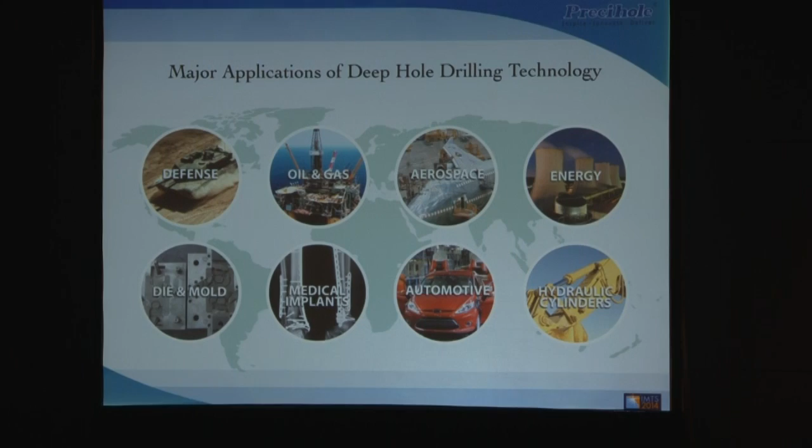So, deep hole drilling technology, although it finds applications in many industries, the major applications really are defense, firearms, oil and gas, aerospace, energy, nuclear, solar, wind, die and mold, medical implants - all your bone screws and cannulated nails and drills - automotive, and there are probably hundreds of applications within automotive itself. And then hydraulic cylinders - you have skiving and roller burnishing machines that do hydraulic cylinders. So this is essentially the gamut of where most applications are found for deep hole drilling technology.

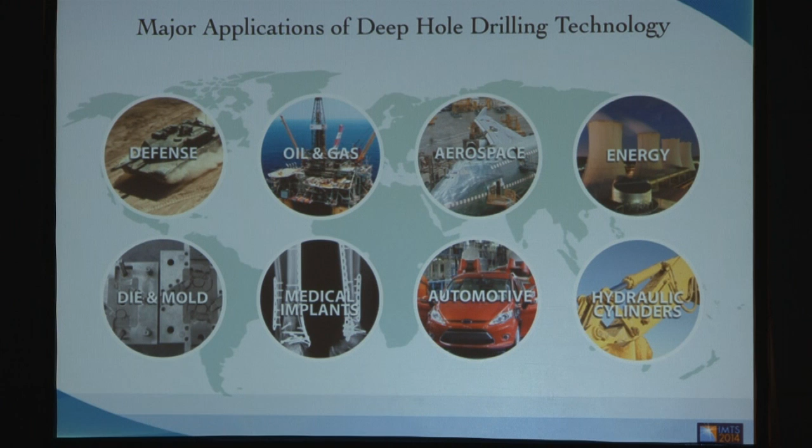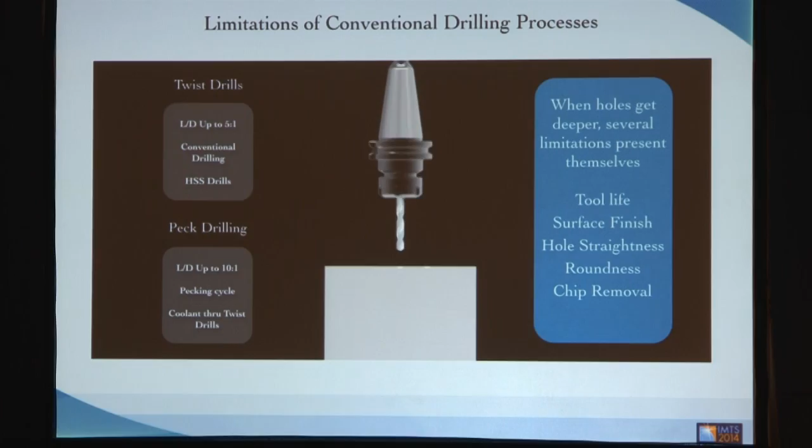Let's take a look at deep hole drilling fundamentals. Essentially, with conventional drilling using normal HSS twist drills, the length to diameter ratios you can achieve aren't much - 5:1, 7:1, etc. You can get slightly more by using peck drilling to get your chips out, maybe 10:1 or slightly more. Coolant-through twist drills can also help with this. But really, when your holes get deeper, issues like tool life, surface finish, roundness, hole straightness, and chip removal become a problem. And that's exactly where deep hole drilling technology comes in.

So what is a deep hole? How do you define a deep hole? By definition, wherever the length to diameter ratio is more than 10, that hole is defined as a deep hole.

The different configurations for deep hole drilling are: first, where the tool is rotating and the component is stationary - used for asymmetric parts with off-center holes. Second, where the part is rotating and the tool is stationary and feeding - used for round parts with central holes. And third, where the tool is rotating and the part is counter-rotating, which gives a very straight, precise hole, more accurate than the previous configurations. This is obviously more expensive because counter-rotating the part means the setup, steadies, etc., grow, so the machines are more expensive, but it's still a better technology to use if you can.

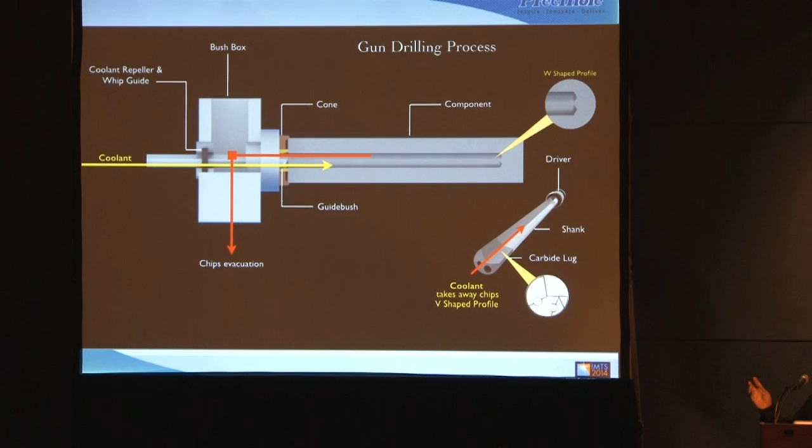The design of the gun drill, as you can see on the side, consists of three parts. The outer part is the carbide lug, which is brazed onto a long tube, and then there is a driver that gets inserted into the spindle. So this is the design of the gun drill. The coolant comes from within, and the chips and swarf come from outside this kidney-shaped cavity.

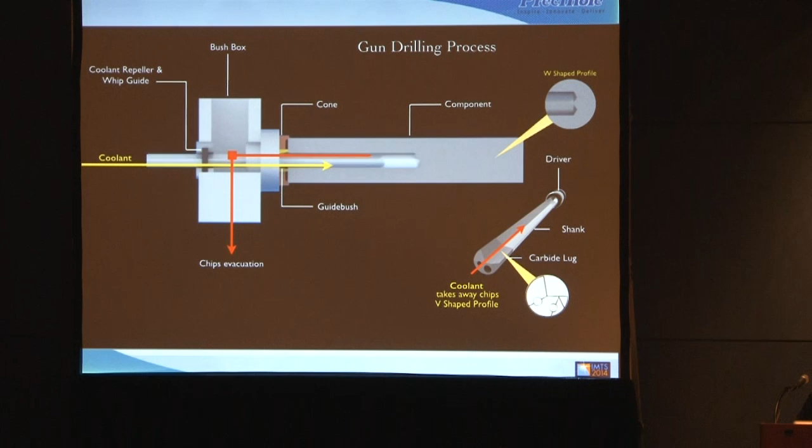Let's take a look at it one more time. Let's take a look at the BTA drilling.

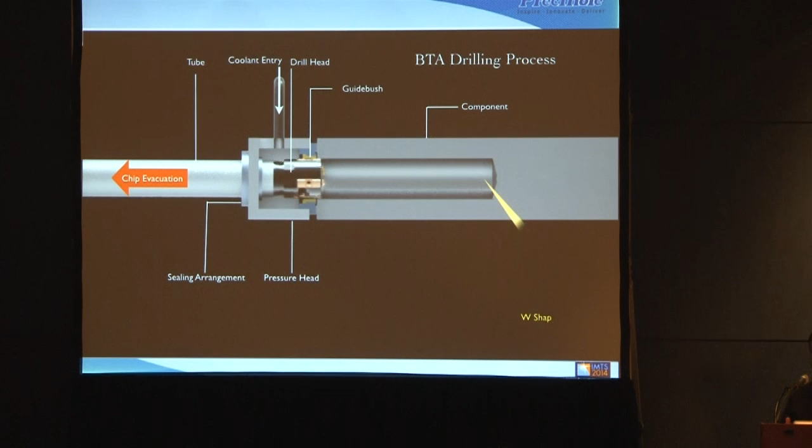For larger diameters, you have the BTA process where the component is held in a cone or chuck, and you have a pressure head from which high pressure oil is put into the system. The drilling action takes place, and the chips and coolant are fed from behind, going back through the tube and evacuated. This is the arrangement for the BTA drilling process.

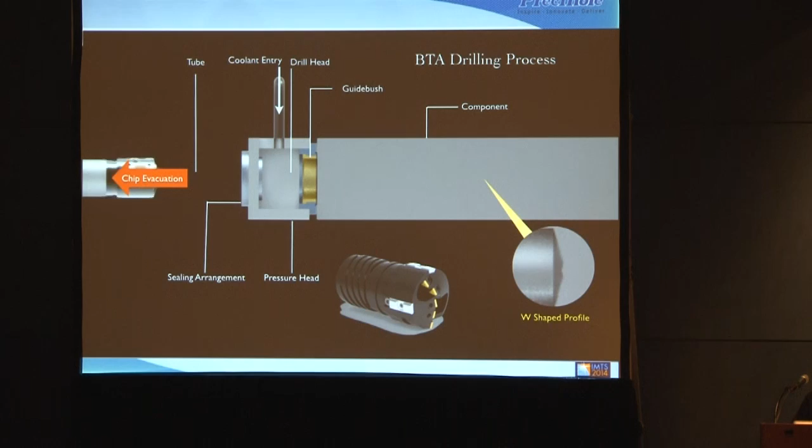Now let's take a quick look at some of the output measures in deep hole drilling. Really, this is what defines success. How do you measure deep hole drilling? There are three critical parameters, and we'll focus the rest of the presentation on ensuring how to get the best output for these parameters. The first one is hole straightness, the second is hole tolerance, and the third is hole surface finish. If you can control these three parameters, you have success in your deep hole drilling application.

How do you define hole straightness? Hole straightness is defined as the maximum deviation for the hole compared to the center line. There are a lot of factors that affect your hole straightness, including the configuration of the gun drilling setup. As we said, there are three setups, and the counter-rotating setup gives you the best results.

Guide bush design and accuracy - we're going to talk a lot about guide bush for the process in the coming slides. The tool and insert condition, the tool geometry, the angles and tapers that you have, the input condition of the component itself - how well is it faced, how well is it chamfered, and the material itself.

The material in deep hole drilling is very, very important. If you have good quality material that is homogeneous - meaning the hardness of the material is even throughout - you get very good results.

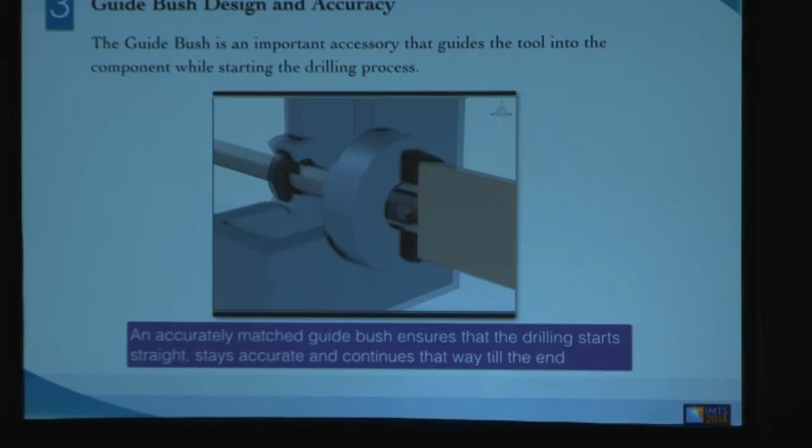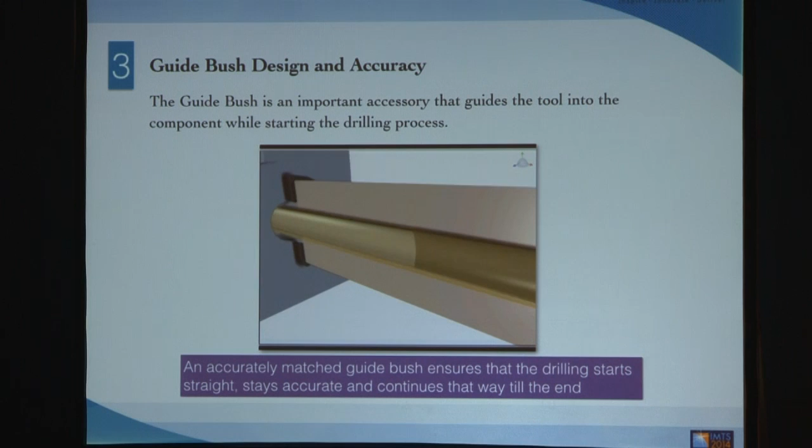The next very important factor is the guide bush. The guide bush is an accessory that guides the drill into the part when the drilling process starts. This particular guide bush is a very critical factor, because if you don't have good matching, then the drilling starts bad, and what starts bad really cannot end good. Essentially, a guide bush is a very important accessory to have in deep hole drilling.

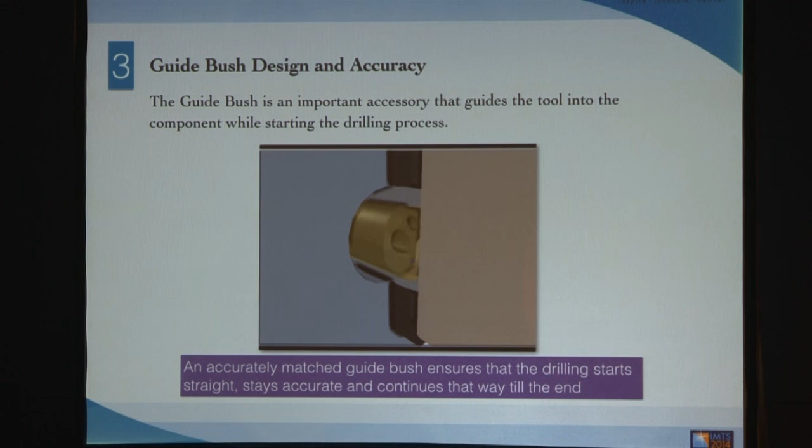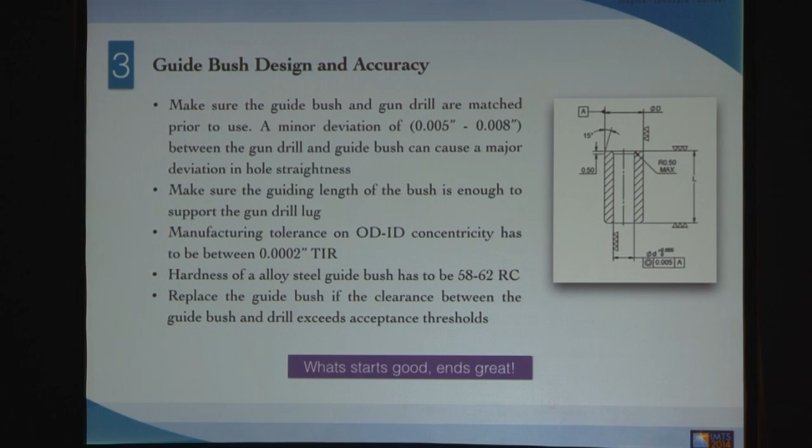Some additional notes on the guide bush, since it's that important. Really make sure that the guide bush and the gun drill are matched prior to use—that's one of the best practices. You cannot have any play between the guide bush and the gun drill; it needs to be manually matched for best results. Any play results in bell mouthing at the start of the hole, and once that gets bad, it's very difficult to correct later. The guiding length of the guide bush is also very important—it needs to make sure the gun drill has enough support when it enters the component at the start of drilling.

The manufacturing tolerances matter too. We manufacture guide bushes, but we spend the most amount of time manufacturing the guide bush rather than any other part of the machine, because it's so important. The manufacturing tolerances on these guide bushes, whether for gun drilling or BTA, is very important. Hardness of the guide bush is also critical, because if you don't have enough hardness, it's going to wear out very soon and you'll have to replace it. So what starts good ends great—that's the general rule for guide bushes. It's a very important factor in deep hole drilling.

The next factor is obviously the tool or insert selection for your deep hole drilling. Many tool manufacturers give a wide range of speeds, feeds, and coolant pressures as recommendations for your application, but those recommendations really need to be fine-tuned. Selection of the right tool is key—if you have harder materials, you need a coating on your tool to successfully drill them. The grade of carbide used in drilling is very important, as is the configuration of the support pads for gun drills or BTA cutters. There's a lot of choice that tool manufacturers offer, but selecting the right one makes a big difference in your output results.

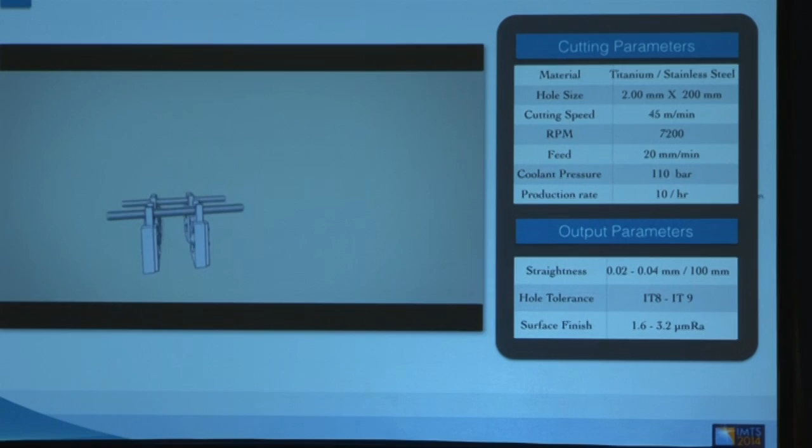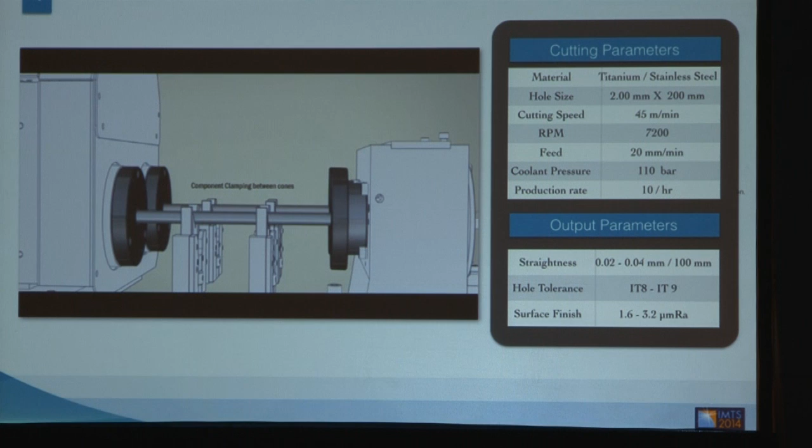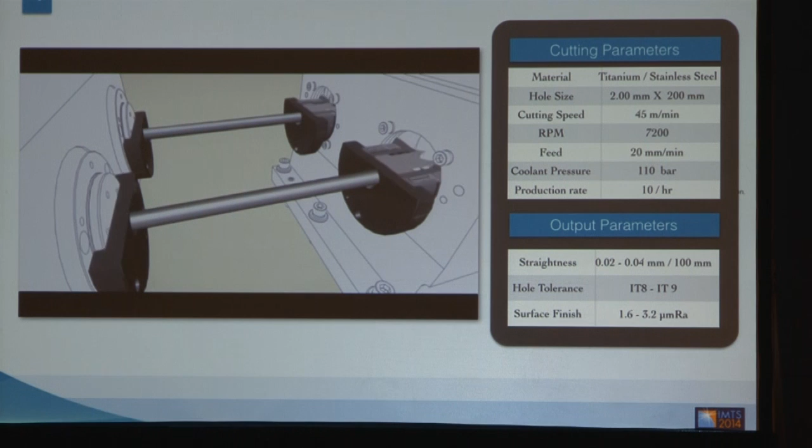So this is in the medical implant industry, these are bone screws being drilled. The material is titanium or stainless steel, which are the toughest materials to drill.

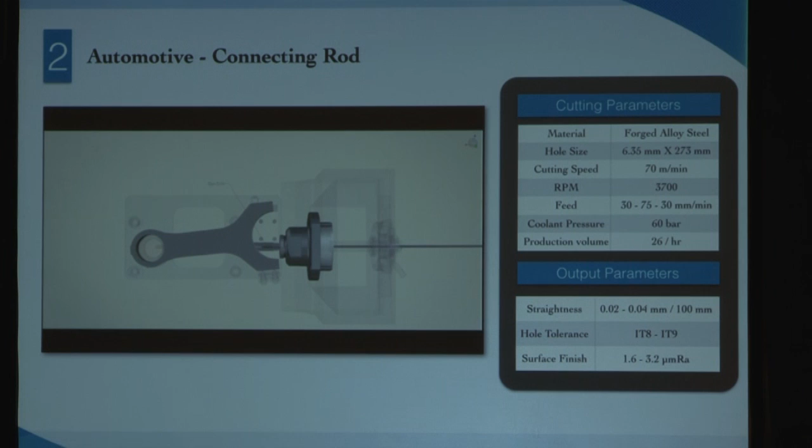The next one is in the automotive sector—connecting rods that need to get drilled. This is actually an angular application, so the design of the guide bush and the butting of the guide bush to the component are really critical. You'll see how the drilling takes place: the angular guide bush butts against the component, and then the drilling starts. This is essentially angular drilling, using a fixture on the table.

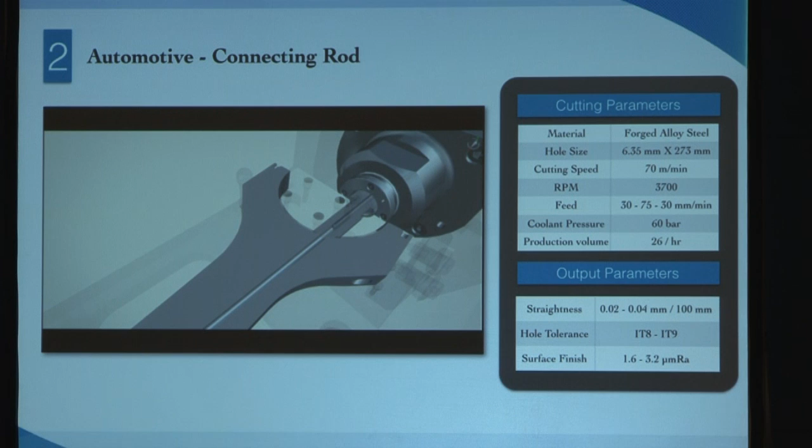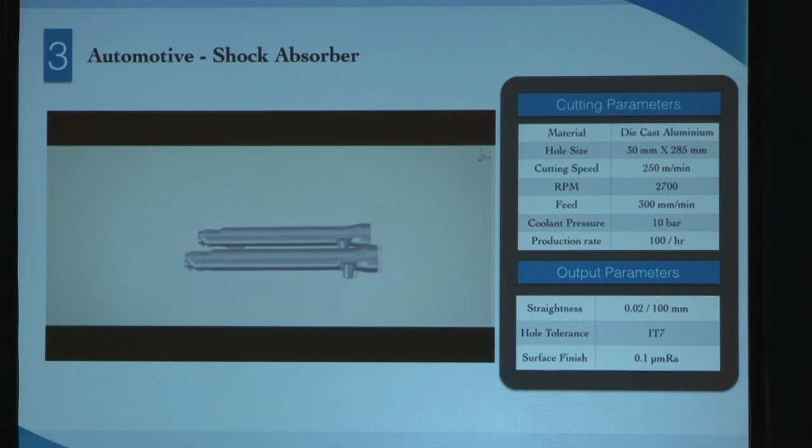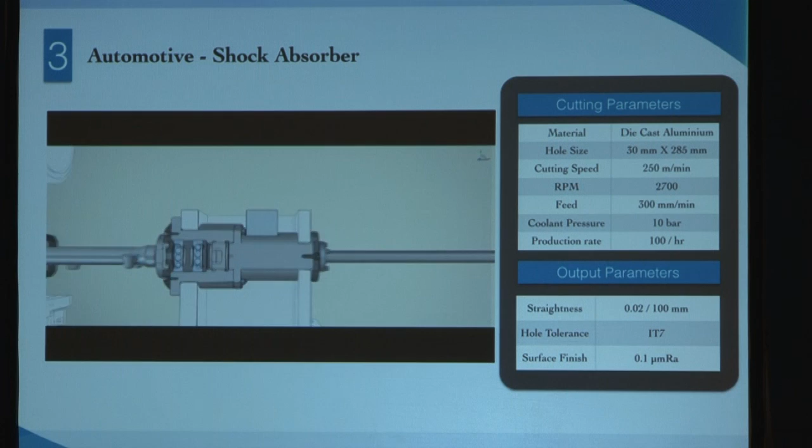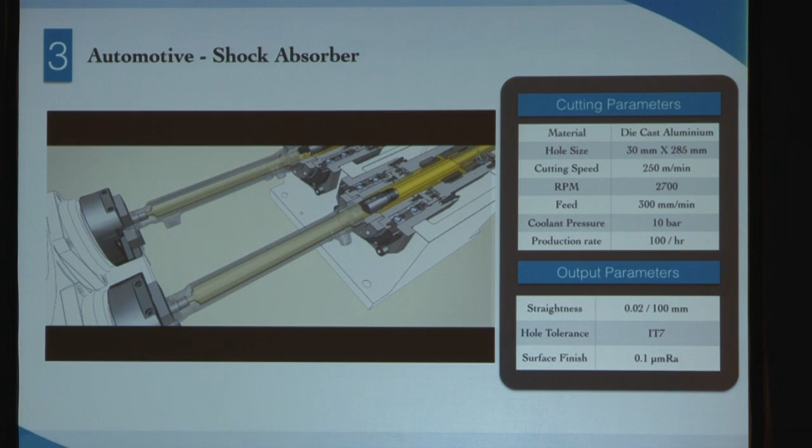The next application is a shock absorber, where you are counter boring and finishing, not just gun drilling—the hole already exists and you're trying to enlarge and finish it. This is also an automotive application. You'll see the setup: the inside of the pressure head and guide bush, with the drilling tool coming in to enlarge and finish the hole. The components are rotated, the cutting tool comes in and bores the component, and the production rate is about 100 an hour for these components.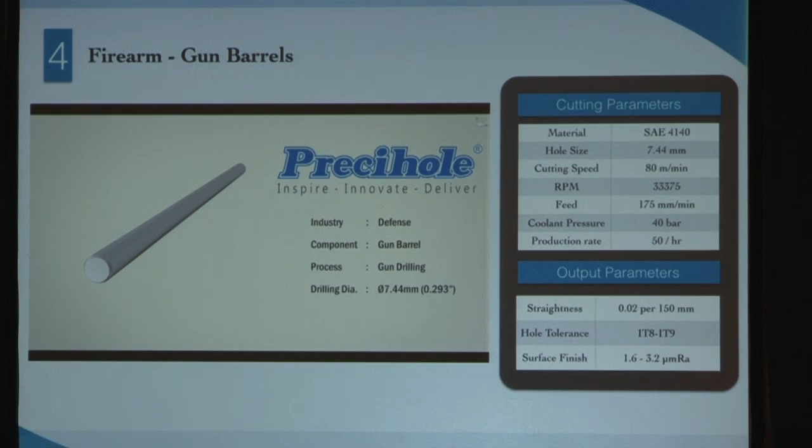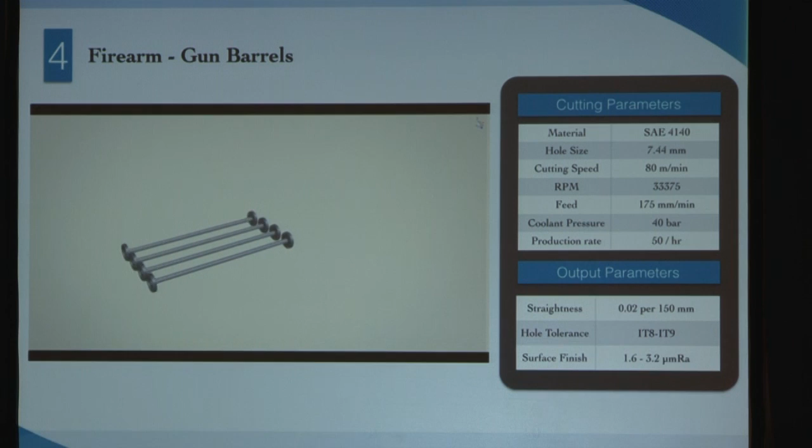The next one is a favorite in the gun drilling industry—gun barrels, a very common application. These are AR-15 barrels, essentially. The material can be 4140, 4150, or SS416R. We have a 4-spindle machine for drilling these for high volumes of gun barrels, with feed rates of about 7 or 8 inches per minute. This produces about 50 barrels an hour with very good straightness, surface finish, and hole tolerance.

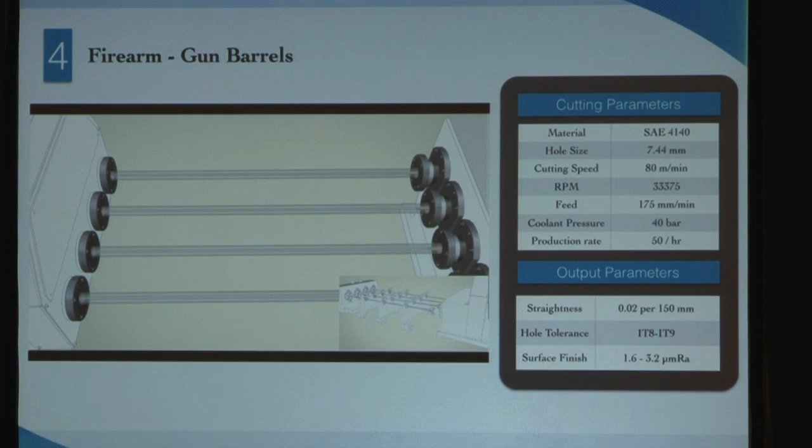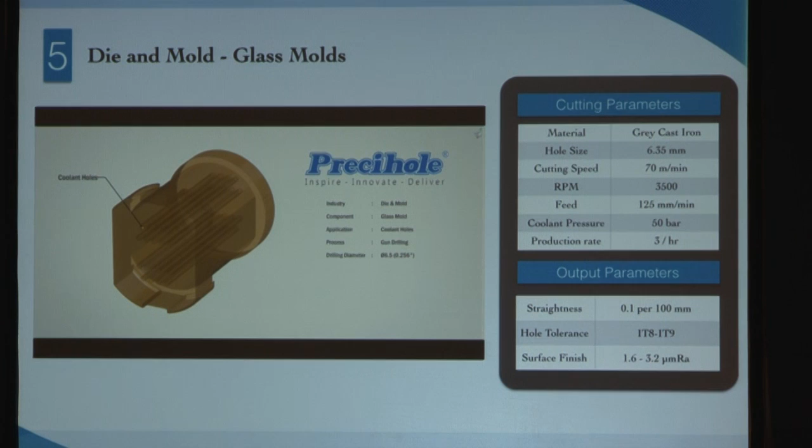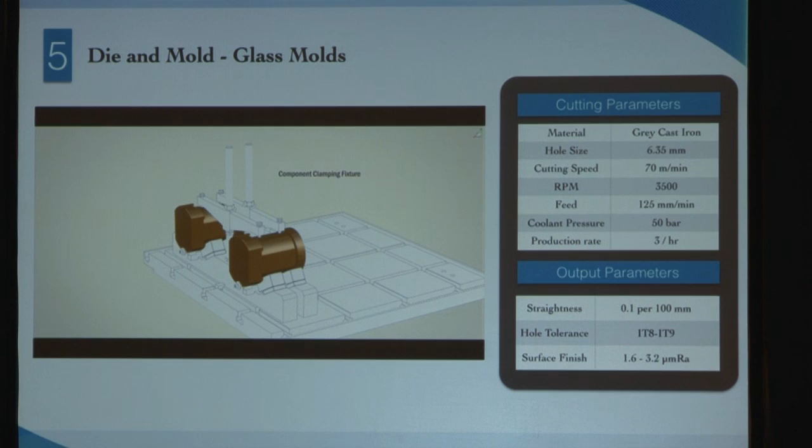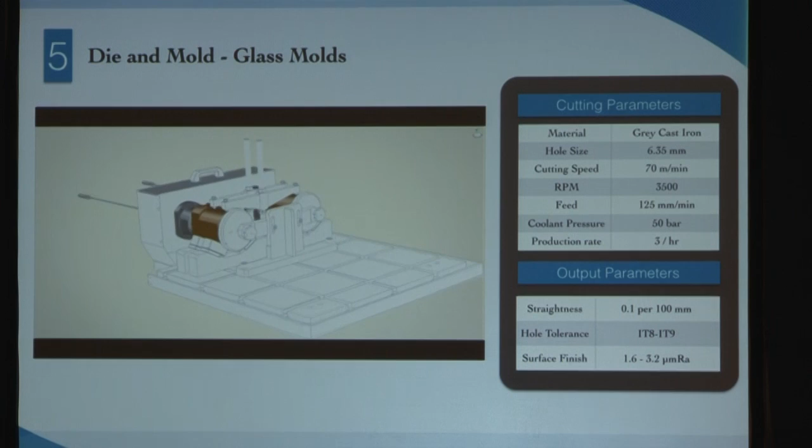The next one is an XY type of application, where multiple holes need to get drilled in one setup. The best example is glass molds, which have about 90 to 100 holes that get drilled. The production or volume requirement of this industry requires a multi-spindle machine—1, 2, or 4 spindles for drilling these holes. Multiple holes get drilled in just one setup, very accurate, very fine holes in cast iron or brass.

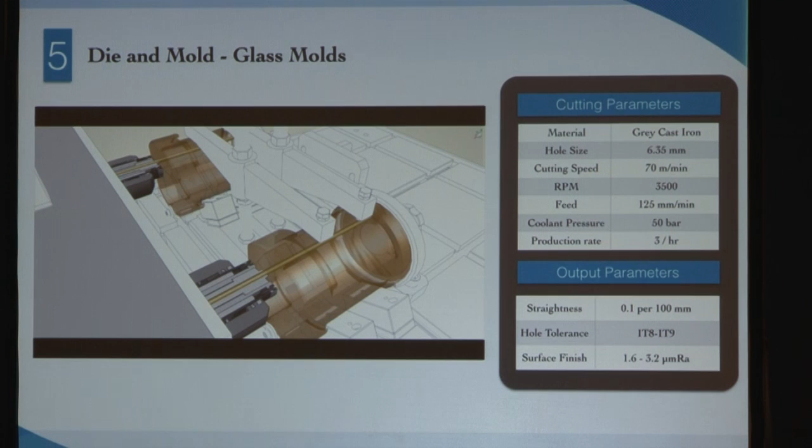You can see the gun drill comes and drills the first hole, then the table indexes by itself, locating the next hole, and then drills the next hole. So using this type of setup, you can drill hundreds of holes in one part in just one setup.

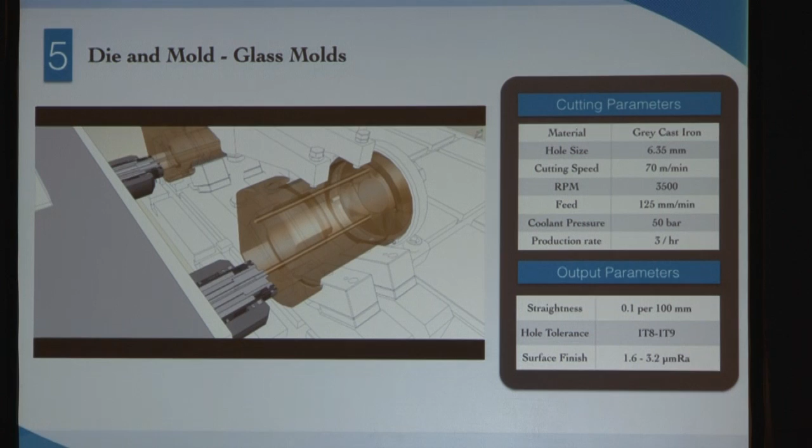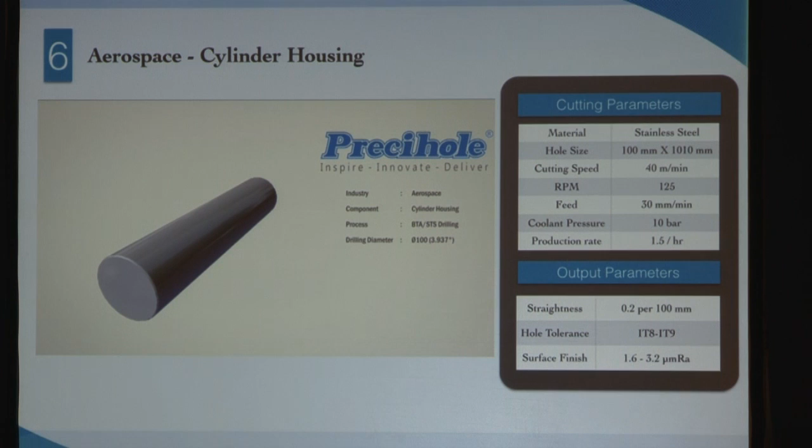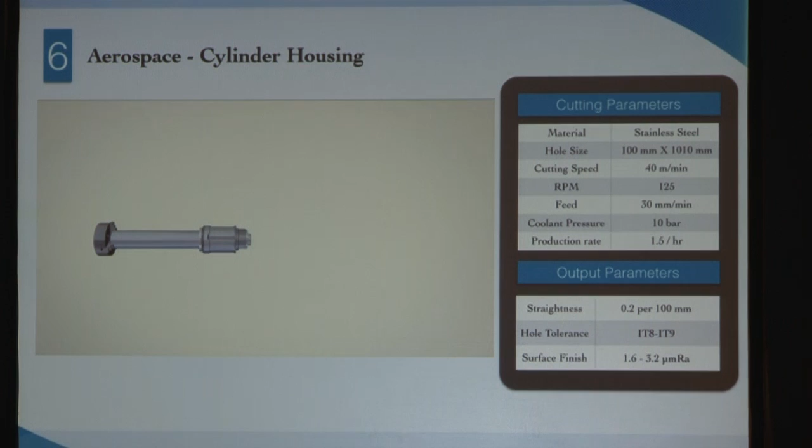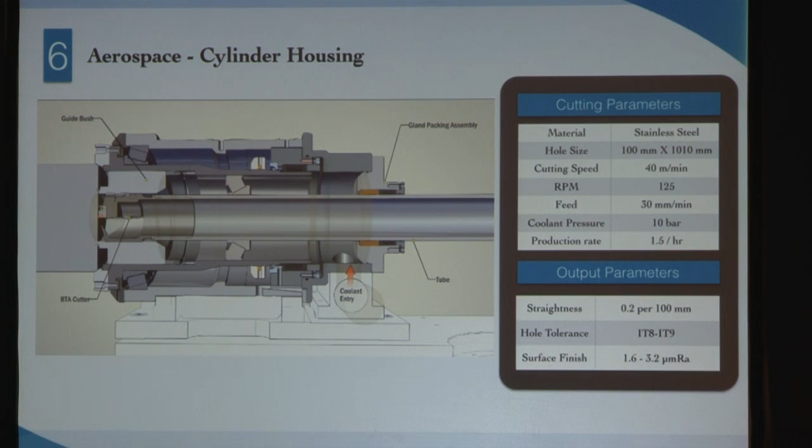The last one is a cylinder housing, in which I'm going to show you BTA drilling. We covered a lot of gun drilling applications, but for BTA drilling, this is about a 4-inch hole. The component is located back in the chuck, with a steady vibrational damp. This is the inside of the pressure head and guide bush.

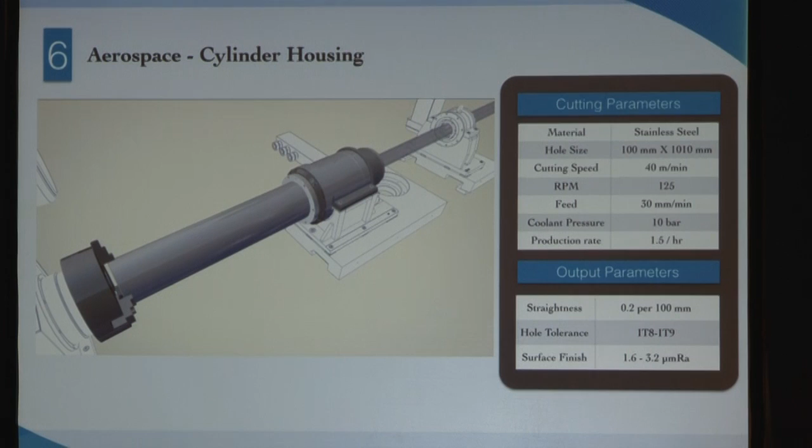So these were some real-world examples of how the drilling takes place, what are the cutting parameters, and what are the output parameters that you can get.

Now let's take a quick look at machine tool solutions that Precihole offers. Predominantly, the machine tools we offer are divided into 3 parts. The deep hole drilling machines.

You have single-axis gun drilling machines, multi-axis deep hole drilling machines, BTA drilling machines, multi-axis BTA drilling machines, ejector drilling machines. Then you have hole finishing machines, which are skiving and roller burnishing machines, honing machines, pull reaming machines, and lapping machines. And then we have custom designed special purpose machines that suit your applications.

Really highly customized deep hole drilling machines that are designed and suited for your applications. Facing and chamfering machines, broaching and rifling machines, for all small as well as large bore calibers. And then you have boring machines.

Our gun drilling machines — this is the world premiere that we have at IMTS for the micro gun drilling machine. It's really suited for the medical industry, but in fact, any small hole from 1 millimeter to 6 millimeters, up to a foot long, up to 12 inches, can be done on this machine.

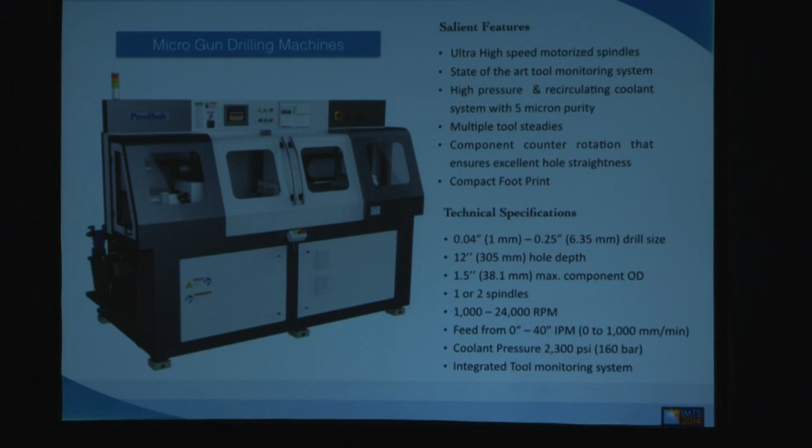We are providing 2 spindle configurations — it comes in 1 or 2 spindles. It has ultra high speed motorized spindles, coolant pressures up to 2300 psi, 1 or 2 spindles, as I said, 24,000 RPM on the spindles. Tool monitoring system already built into the system, and a very, very compact footprint — more like a tabletop design.

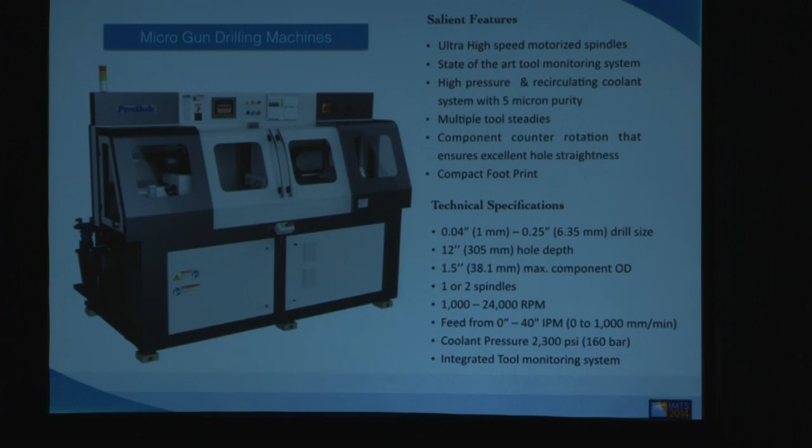And these are just some pictures of our micro drilling. We are in S8536 in the South Hall — you can come and visit us. But this is the machine that we are really premiering at the show. This is the world premiere — the first time we are introducing this machine. It's already proven, and we are introducing it here at the show.

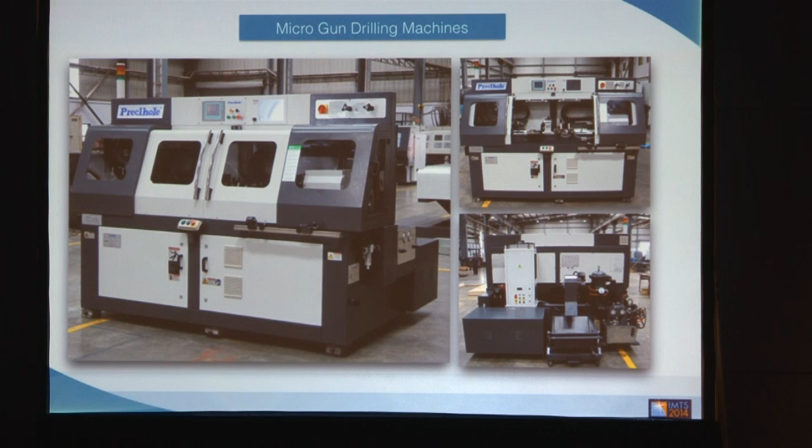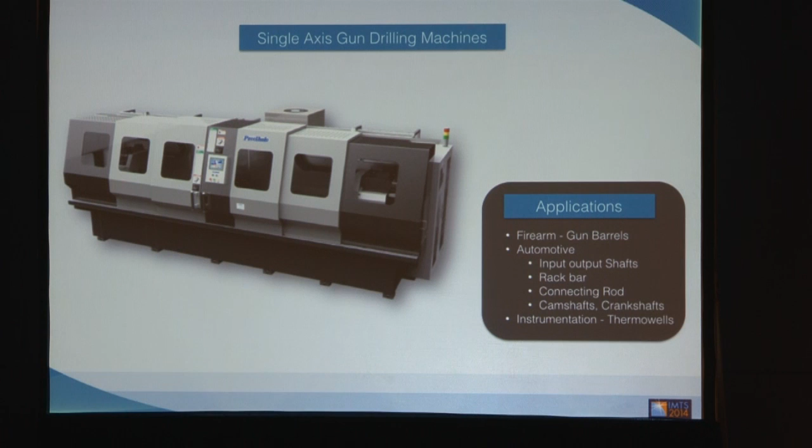Our workhorse is really the single-axis gun drilling machines — we make most of them in a year. Applications are in firearms, gun barrels, automotive, and a lot of applications in automotive instrumentation as well. These come in 1, 2, or 4 spindles, and in 24 inches, 30 inches, 40 inches, 60 inches length. So these are essentially single-axis gun drilling machines with PLC or CNC controls that we make.

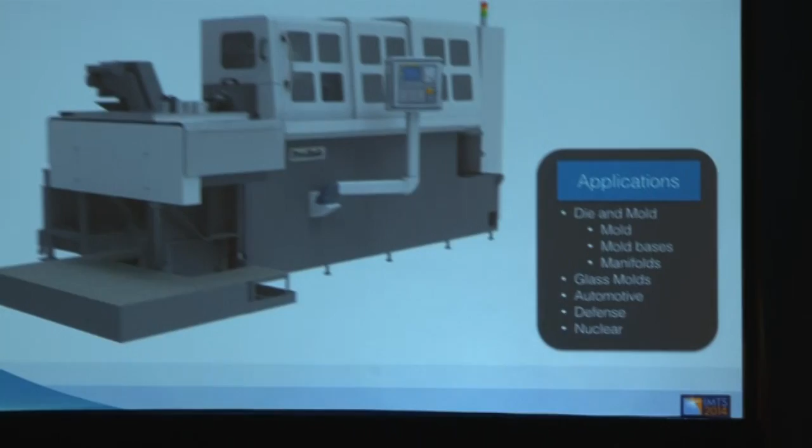The next one is a 3-axis gun drilling machine with XY motion. This has a knee-type structure in which the table moves up and down, giving the X and Y, and the drilling is the Z-axis. We give this machine in 1 or 2 spindles, and it's for industries that require multiple holes to be drilled in the same setup — you can drill hundreds of holes in just one setup using this type of machine.

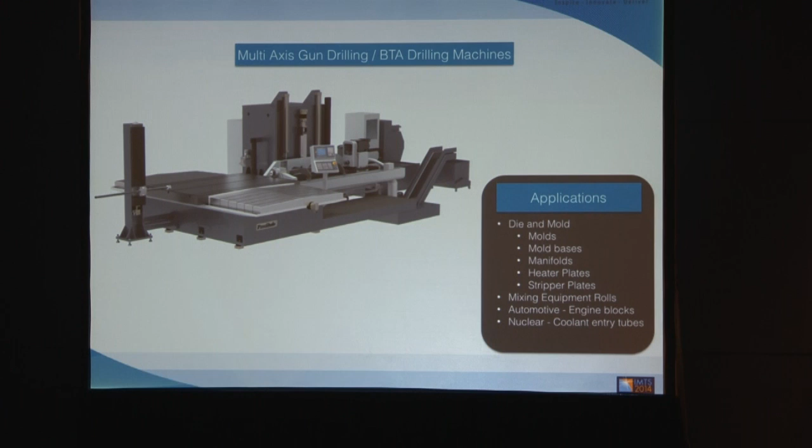The next one is a multi-axis gun drilling, or BTA machine. This goes from 3-axis to 9-axis CNC, and has a very large table for components like mold bases, with rotary axis, the B axis, the A axis, angular motions, and the Z axis. We also provide secondary spindles for drilling, tapping, milling, etc. These are some of the bigger machines we provide for larger components, and again in this one, you can drill multiple holes in the same setup.

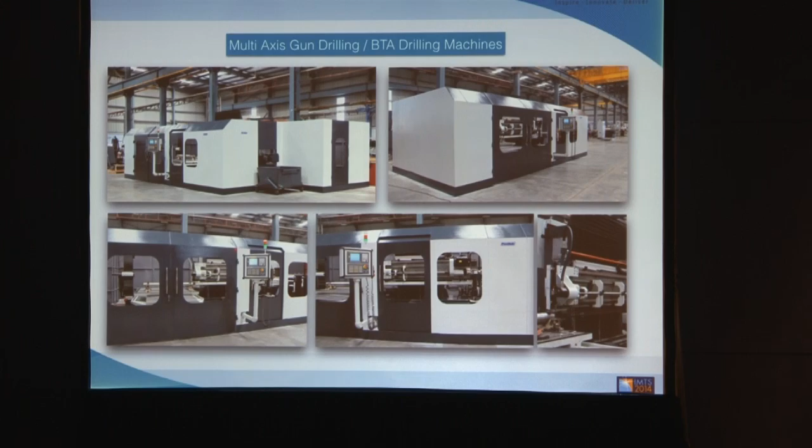For the larger size, we have of course the BTA drilling machines — for larger holes, longer holes, especially suited for artillery barrels, aerospace landing gear shafts, or oil and gas. A lot of applications in the oil and gas industry for these types of machines, and also energy.

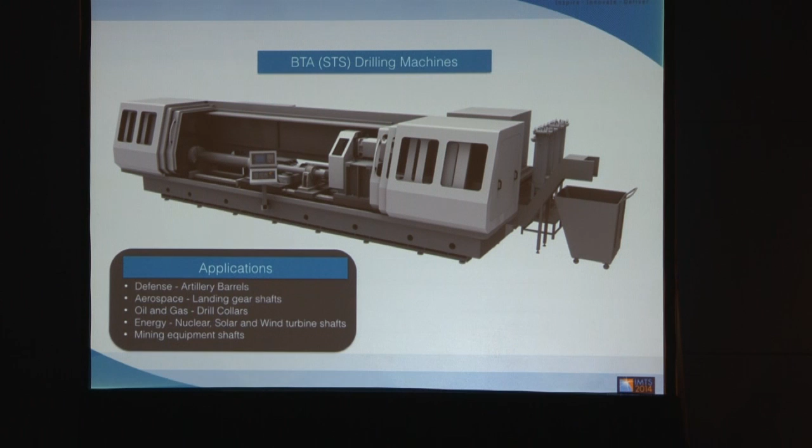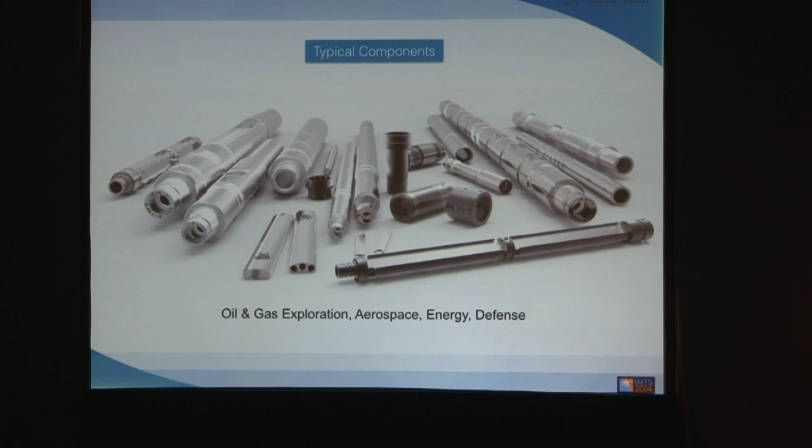So essentially, we are deep hole drilling and hole finishing specialists. We are in hall S8536 at the Absolute Machine Tools stall. Please visit us if you have any applications you need to discuss, or if you have any questions regarding deep hole drilling technology. We'll be more than happy to help you through your applications. Okay, thank you so much.